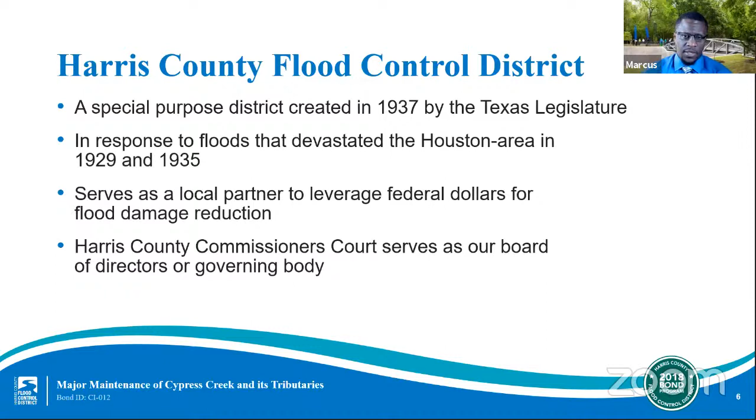The Flood Control District was created to serve as a local partner to leverage federal funding for flood damage reduction projects. While the Flood Control District is a separate entity from Harris County, we are part of the Harris County system and governed by the Commissioners Court.

The mission of the Harris County Flood Control District is to provide flood damage reduction projects that work with appropriate regard for community and natural values. One of the most difficult challenges we face is constructing effective projects that are sensitive to community and natural values in highly urbanized areas.

Harris County includes 22 main watersheds totaling approximately 1,800 square miles and more than 2,500 linear miles of channel. 2,500 miles is approximately the distance from New York to California. A watershed is a geographical region of land that drains to a common channel or outlet. Each watershed has its own unique characteristics and needs. The project we are presenting tonight is in the Cypress Creek watershed located in North Harris County.

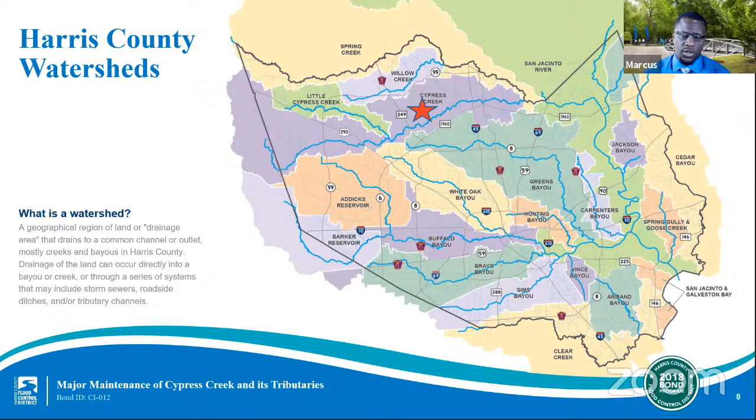Our area is flood prone, and here are some reasons why. We're prone to extreme rainfall events, including tropical storms and hurricanes. We have flat, slow draining land and topography. We also have clay soils that do not soak up excess rainfall quickly.

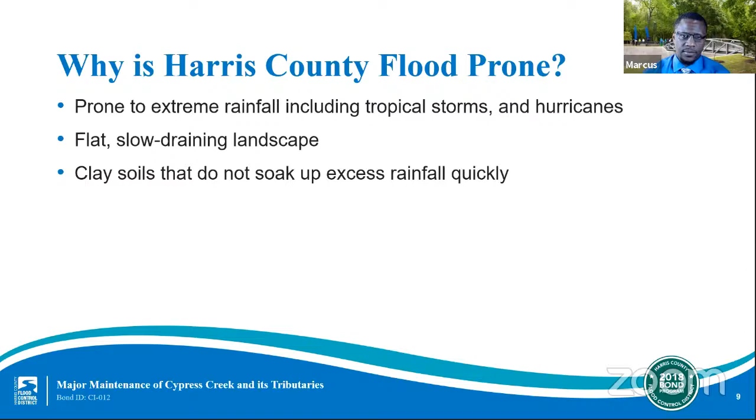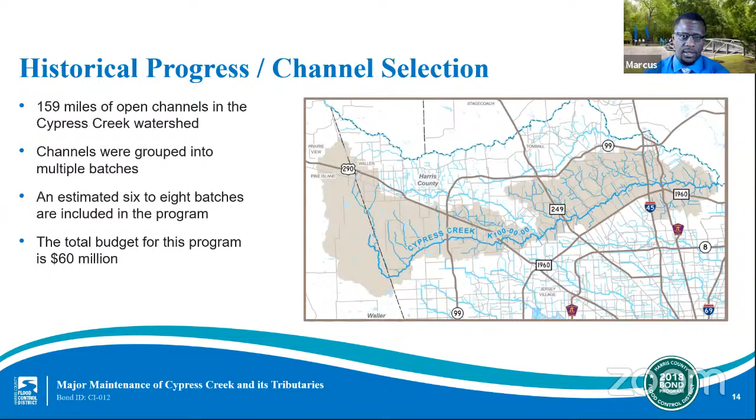The Flood Control District completed field assessments of the channels in the Cypress Creek watershed to determine the state of those channels and the scope of work needed on each. In order to maximize the number of crews and work being done, we broke the scope of work into batches. Batches include channel projects that are grouped together by geography or other factors. For this project, we're planning to have between 6 and 8 batches with a total budget of $60 million.

This program includes channels within Cypress Creek watershed for which the Flood Control District has property rights. Channels that are included are newly built or have previously been altered from their natural states. Natural channels are not included except for on the main stem of Cypress Creek. For the first 3 batches, there will be nearly 20 miles of channel modifications in the Cypress Creek watershed. As I previously mentioned, there will be up to 8 batches of channel improvements over the course of this project.

So why are channel repairs needed? Repairing and restoring channels back to their original design allows the channel to convey or move stormwater runoff from the watershed. It enhances positive drainage and restores the channel capacity. Finally, it increases adequate access for the Flood Control District maintenance crews to mow or do repairs if needed in the future. This is not a dredging or widening project. We are simply restoring the channels to their original design.

There are many types of maintenance that will occur over the life of this project, including desiltation, which removes accumulated sediment from the channel. Outfall pipe replacement, which replaces pipes that carry stormwater from neighborhood, ditch, and storm sewer systems to flood control channels. Repair of slope erosion caused by fast moving water. Reestablishment of maintenance berms by clearing vegetation. Repair of damaged concrete lining where needed, and removal of encroachments from the flood control district right of way. Each of these play an important role in our efforts, and we will now discuss a few of these in depth.

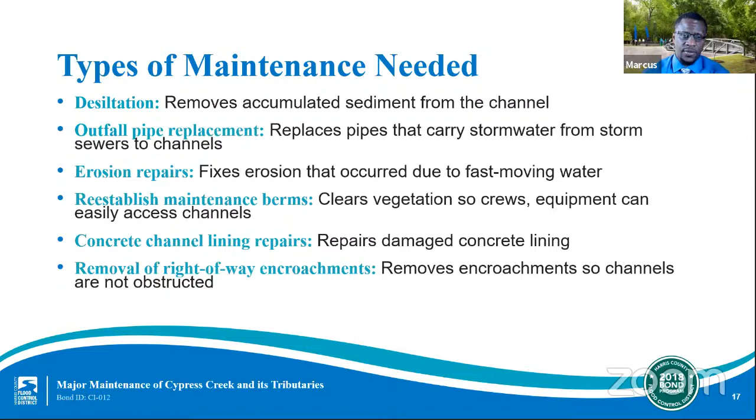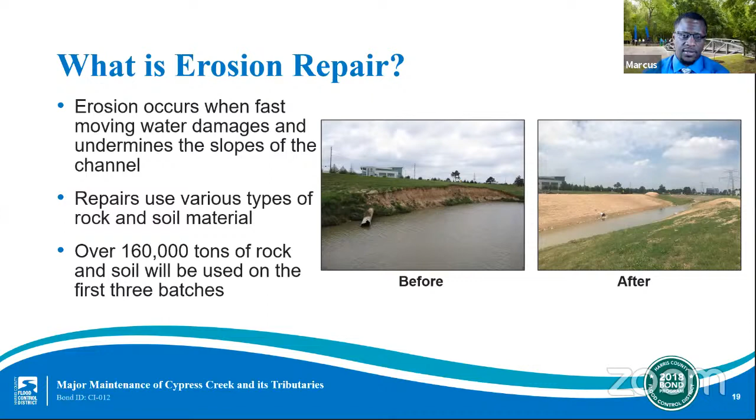Next is erosion repair. Erosion occurs when stormwater removes portions of the channel slope, creating a hole or a sheer drop. Severe erosion can potentially damage other nearby public infrastructure, such as utility lines and roads. The flood control district uses various types of rocks and soil material to repair and protect the slopes from future erosion. Rock material is buried and eventually planted with grass. It is cost-effective and environmentally friendly. In the first 3 batches alone, we will use over 160,000 tons of rock and soil for erosion repair.

Finally, encroachment removal. Encroachments are permanent or portable structures or objects that have been placed in the flood control district right-of-way, including things like fences, swing sets, sheds, swimming pools, bird baths, and other outdoor furnishings.

Encroachments on flood control district property can obstruct drainage channels from carrying stormwater efficiently, block maintenance equipment from performing necessary repairs, increase the overall cost of maintenance of existing infrastructure, and prevent rescue workers and first responders from reaching people during particularly hazardous weather events.

If you receive an encroachment removal notification from the flood control district, the flood control district's encroachment removal office is available to assist the property owner through the entire process. To learn more about encroachments or the encroachment removal program, submit your questions and comments and visit www.hcfcd.org/encroachments.

We know that trees are important to residents of the Cypress Creek watershed, and we've worked extensively with our urban forestry team on tree protection, root pruning, and vegetation removal. We have identified and are protecting many large and mature trees along many of the channels. We would do extensive vegetation removal to reestablish the maintenance berms, which was one of the types of maintenance I mentioned earlier.

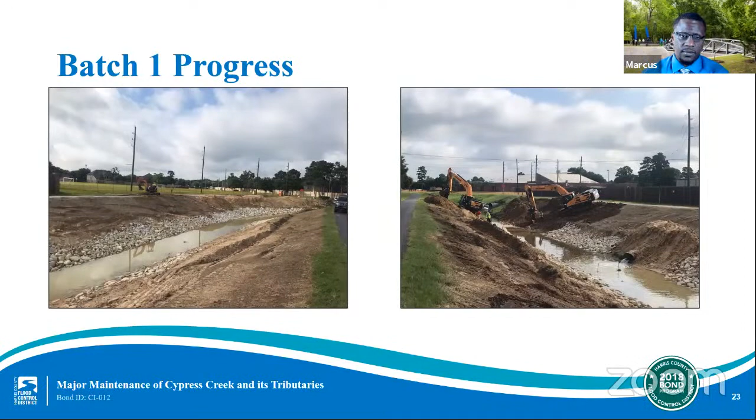Batch 2 includes approximately 5.6 miles across 9 different channels. The cost for this batch is $3.3 million. The estimated start date is later this summer, with construction concluding at the end of 2023.

Batch 3 includes approximately 5.8 miles on at least 11 different channels. The cost for this batch is $10.8 million. We're planning to go out for bids on this later this summer, so construction will begin this fall and conclude in late 2023. Please note that we will be adding additional channels before going out for bids, so please check the web pages for updates.

Here is a full breakdown for the 3 batches, starting with the number of channels and channel length. The total figure for rock placed includes granular fill, or smaller pieces of soil, and riprap, which is larger rocks that are used to fill in and protect against future erosion. Finally, the last column shows the total length of storm sewer outfalls that will be replaced.

Now let's take a look at the next steps. As I mentioned, batch 1 began construction in early June. Batches 2 and 3 both will start later this summer and fall, respectively. We're currently determining the channels to include in future batches. We plan to hold additional community engagement meetings for this project annually due to the extensive geographic size and timeline of the project. I will now turn it back over to Imelda to kick off the Q&A.

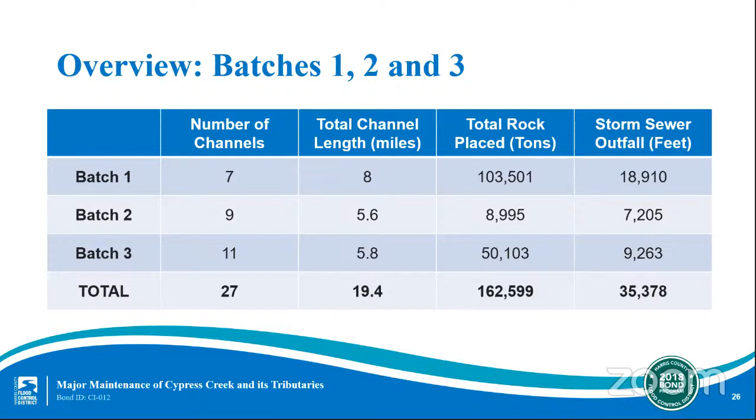Thank you, Marcus. We have another question coming in for you. What are the benefits of removing silt to reduce flood risks?

So as we have different storm events, as the water comes up, it's moving very fast. It picks up soil along the way. And then as the water starts to recede, it slows down, and that extra silt that's picked up is deposited somewhere else within that channel. So by desilting these channels, it allows us to restore them to their original carrying capacity.

So at some point, maybe there were 5 to 6 feet within a channel, but over years and years of storm events and picking up silt from other locations within the watershed and depositing them in these tributaries, then by removing that, you restore the carrying capacity, thereby increasing or restoring the conveyance, which was originally intended for the design, and thereby reducing flood risk.

Thank you. We have a question coming in from Greg. Greg is asking, does this include Little Cypress Creek Watershed? So the desilt for these projects do not include anything in Little Cypress Creek Watershed. This would be only the tributaries which are man-made within Cypress Creek and a few locations along the Cypress Creek main stem.

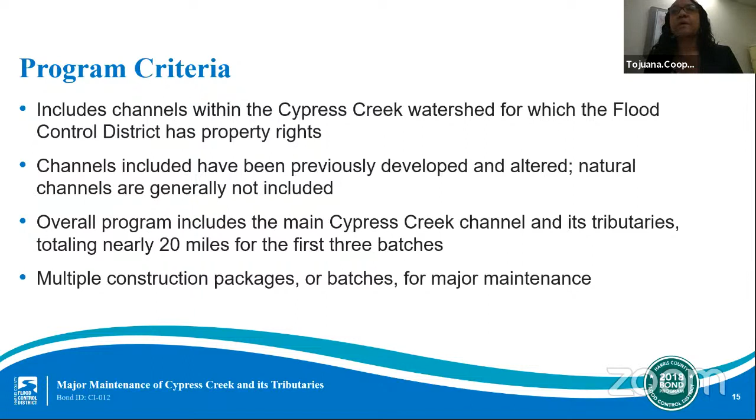No, this project will not eliminate flooding. Although this project will reduce the risk of flooding in the area, the risk of flooding will remain, and any area in Harris County can flood given enough rain. The Flood Control District recommends that everyone in Harris County and surrounding areas have flood insurance to insure against the possibility of personal and financial loss.

So visit www.hcfcd.org/MAAPNEXT to learn about the Flood Control District's MAAPnext initiative, which aims to produce Harris County's most comprehensive and complete set of flood hazard maps and information. Thank you so much for that information.

Marcus, can you explain why we're not widening or deepening Cypress Creek itself? So we had a recent study of the Cypress Creek watershed and found that the main source of flooding within the watershed wasn't the insufficient capacity of the tributaries, but actually the backwater rising from Cypress Creek. So widening and deepening Cypress Creek and other natural channels becomes complicated and expensive because it requires extensive environmental permitting from the Corps. In flood control, we've typically focused on building stormwater detention instead. There's more information about that on the website.

The widening or deepening of tributaries, like widening or deepening of Cypress Creek itself, would also require the additional purchase of right-of-way, which would include taking homes and businesses, which would be disruptive to the community. So while this major maintenance project will not widen or deepen tributaries, it will allow them to function more efficiently and carry more stormwater, without the need for disruption or excessive property acquisitions, if you will. With that said, of course, we'll continue to evaluate Cypress Creek and its tributaries on a case-by-case basis.

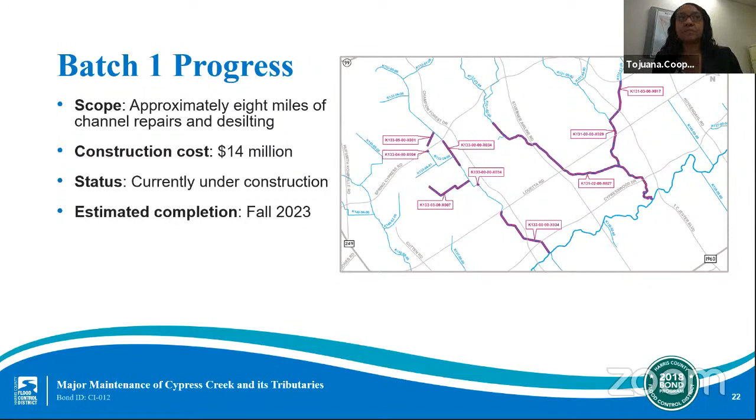Thank you. And Tojuana, I don't know if you want to take this question as well, but we have Paul saying that his house is next to the project area in batch 1. How can we keep children safe during construction? Well, I would hope that the children would not be playing or moving around inside our right-of-way. The contractor basically is responsible for the area that they're working in, and they're going to have some safety measures that they implement. But we do ask people to make sure that they stay away from our right-of-way while the contractors are working in the area.

Great reminder, thank you. We have another question coming in from Leander. He says that they live in Memorial Hills, in a Memorial Hills subdivision. Will these improvements on Cypress Creek result in the creek being able to handle 25 inches to 35 inches of rain?

And I'll take that question. You said 25 inches to 35 inches. No, just to give you an idea of how much that 25 inches of rain is, and I'm assuming that we're talking about a 24-hour period here, that's more than Harvey level. Harvey itself, if you looked at it in terms of a 24-hour period, was about 16 to 18 inches within a 24-hour period. And there's not a channel currently within Harris County that actually handles that much right now.

Thank you. We had a few people joining in late on our phone line. Marcus, can you explain the timeline for this project again, for those that missed it? Yes, so for batch one, we've already started the construction on that one. That was one of the slides where I showed some of the progress of construction in Spring Oaks neighborhood subdivision. Batch two, we expect to start construction late summer this year. And for batch three, we expect to start in late fall of this year, with both of those projects being completed at the end of 2023.

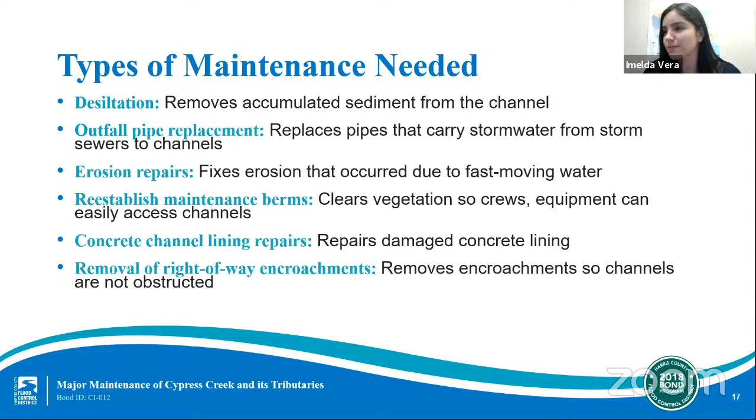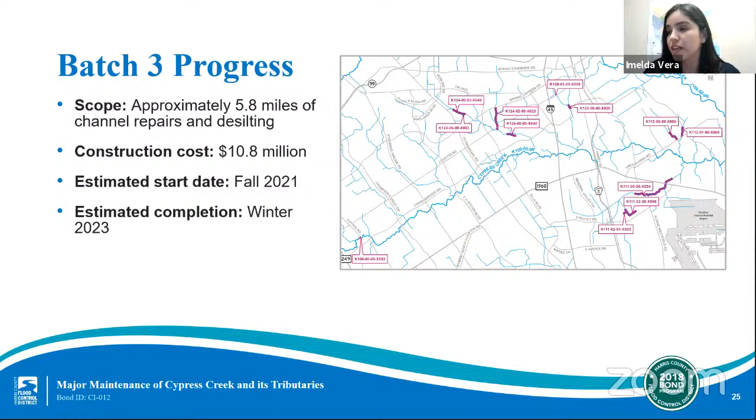Thank you so much. We are getting a question about long-term maintenance. Will Cypress Creek have silt and other debris removed annually to preserve this investment? That is definitely something that the flood control district is working on, and part of some of the plans and discussions that have been going on in Commissioner's Court now. So at this time, that plan to do it on an annual basis isn't there, because what we typically do after storm events is go out and evaluate the channels to determine which portions actually received a buildup of silt, and we submit those to FEMA and other agencies to try to get some partnership funding to desilt those areas which were a result of a major event.

So to answer the question plainly, that is something that we're looking at, having annual or some sort of routine maintenance on some of these natural channels, but there'll be more to come on that later.

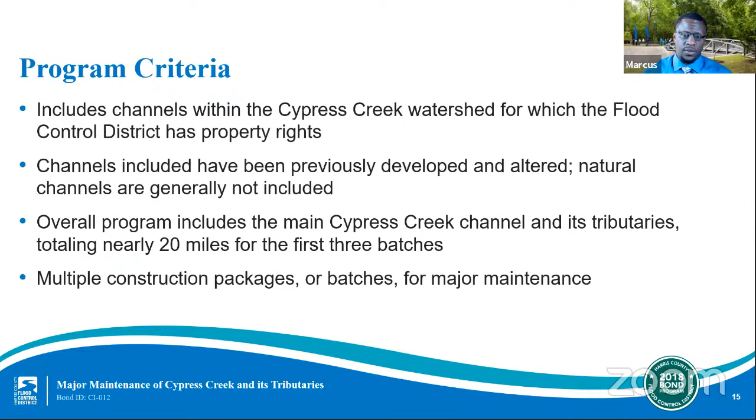Tojuana, the next question is for you. Why not do all the repairs all at once? Why in smaller batches? Okay, well, first of all, the bond program includes $60 million for this project. And most contractors that do this type of work, which is channel repairs and pipe outfall repairs, cannot manage a $60 million project. So the sweet spot for a project of this nature is around $10 million.

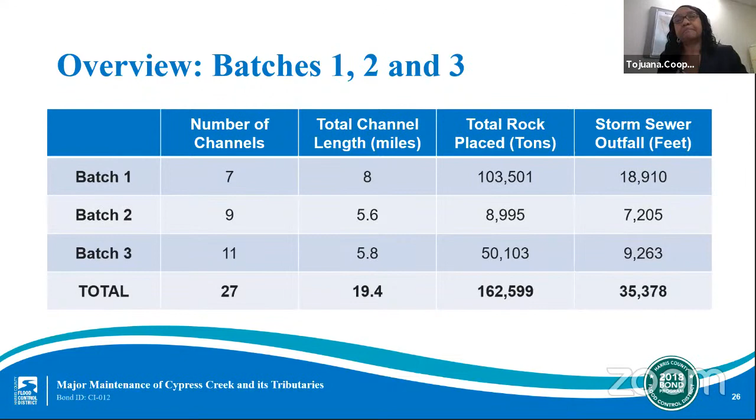Because of this, we decided to break the work up so that we can have multiple contractors working simultaneously across the project. Now, if we tried to do it all at one time, we would also have to consider the environmental permitting issues that need to be resolved with the U.S. Army Corps of Engineers, and that could delay it. So we're actually able to get more work accomplished quicker by breaking it up and not doing it all at one time. Thank you for that explanation.

Marcus, the next question is for you. How is this project being funded? Right now, the project is fully funded via the 2018 bond program. During the meetings that we had prior to the bond election, $60 million was set aside specifically for this effort that we're working on now.

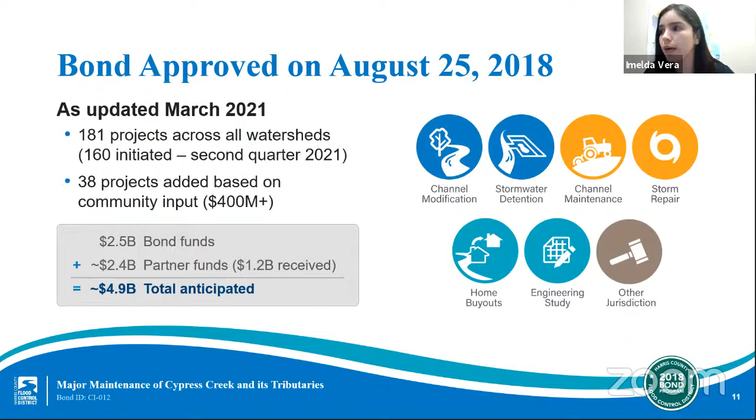Another question for you. Would widening or deepening a channel require additional land to be purchased? In the particular case for these projects, yes, widening and deepening would require additional right-of-way, for a couple of reasons. One being the improvements themselves. As you go deeper with our standard cross sections, the way we design our channel segments and the slopes that we determine handle high velocities better without failure.

Once you start to deepen it, the amount of area that you need in order to get the full channel width and 30 feet of maintenance berm on either side of the channel becomes significant. On some of these tributaries, we have encroachments, and some are right against the edge of our right-of-way. So we pretty much have to purchase people's backyards and in some cases, homes, sheds, or things like that in order to expand the channel.

The second component where right-of-way would be required when you widen or deepen the channel is the detention basin. As I mentioned earlier, the detention basin itself would require land to go somewhere and dig a basin to mitigate those flows, because we cannot widen and deepen a channel beyond its original intent without transferring the risk to someone downstream. In any case, when you do that, you'd have to mitigate those impacts and show with hydraulic and hydrologic analyses that you did not transfer the risk from one area to another.

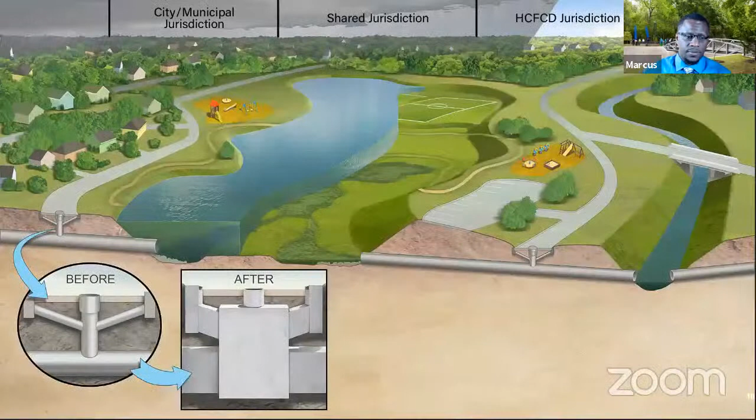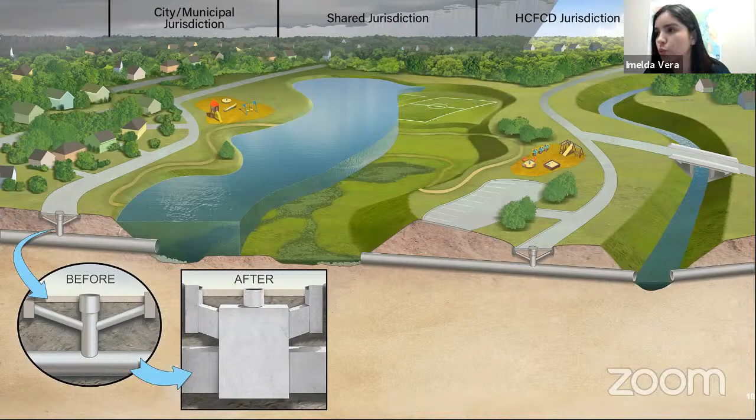Thank you, Marcus. Tojuana, the next question is for you. In the presentation, in the pictures of batch 1 progress, it looks like there are trails. How can our neighborhood build trails along flood control right of way?

That's a good question. While the flood control district's mission does not include recreation, the flood control district supports the multi-use of its property for recreational and other compatible uses, such as trails when appropriate, and works frequently with third-party sponsors who want to finance and maintain those amenities while not obstructing the channel. So in areas where the flood control district does not own the property outright, the trail sponsor must obtain a trail easement from the fee owner of the property. On the other hand, where the flood control district holds the property in fee simple ownership, we will allow a trail to be built there under the following conditions.

Those conditions are: first, a sponsor must agree to construct, operate, and maintain the proposed trail. Second, the sponsor must agree to maintain, which is mow, the rights of way from top of bank to property line on the trail side of the bayou, creek, or channel. And the sponsor must also agree to pick up litter.

The third condition is that a formal agreement is necessary between the flood control district and the sponsor, which could be a city, a utility district, a county precinct, homeowners association, or other legal entity. The fourth condition is that the trails cannot interfere with the flood control district's mission, and the sponsor will have the duty of repair or replacement of the trails should they become damaged through use, flooding, or flood control district maintenance operations. And the public must be allowed access and use of the trails.

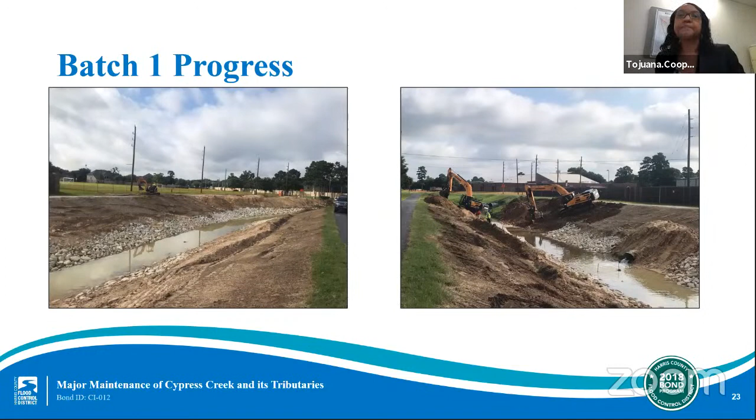Thank you so much for that information. The next question is also for you, from someone that says her channel has been desilted but is accumulating more silt. How often will you be repeating the desilt? How often will the flood control district be repeating the desilt?

Okay, Marcus addressed that earlier. Marcus, would you mind restating the answer to that one, where we talked about repeating the desilt process? Sure. So right now the plans to do these desilts or repairs just depends on the final conclusion of what we come to with our ongoing maintenance program for what we do going forward as a district.

One thing I could say is that during major events, once there's a natural disaster declaration declared, at that point we're allowed to investigate which areas have significant silt accumulations, and then we submit those to FEMA to say, based on this storm event, we've had this much accumulation of silt, and we'd like some sort of funding to repair or remove the accumulation of silt to restore it back to the original design. So as I mentioned previously, there's more to come on that, because it is something that we're working on with Commissioners Court.

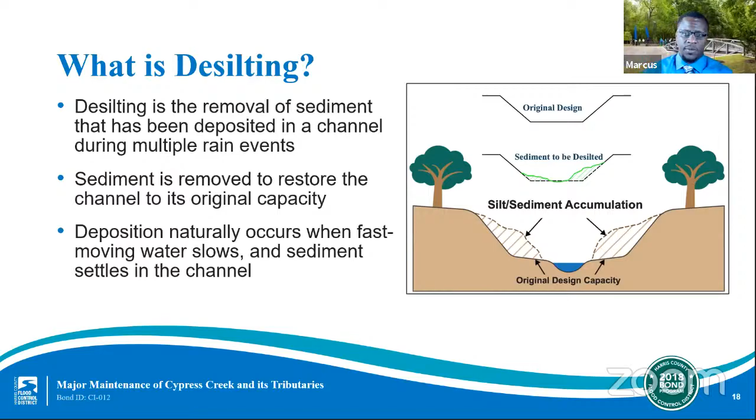Yes. So our flood control guidelines, there are several rules that we have in place to ensure that any new development does not make a situation worse. That includes sometimes providing detention for the additional increase in conveyance to the channel with a detention basin. It also considers the amount of fill, or how high a development builds up within a floodplain.

So for every amount of dirt that the development puts within a floodplain, they have to account for that in some detention facility somewhere. Within our watershed management department, they have the charge of reviewing those reports, making sure they're following the guidelines of flood control and our local floodplain administrator, to make sure that any development that goes in is not making the flooding situation worse. It doesn't always make it better, but it doesn't increase or transfer that risk to others.

Yeah, another question for you. Will this work change the floodplains or floodplain maps?

No, and the reason for that is that this project is simply taking it back to original design. So when the floodplain maps were created, they took snapshots of the channel as they were, and that's what the mapping is based on. So these desilts, while they will provide some benefit - how much, we haven't run the numbers to determine what the silt was versus what it looks like going back to the original design - you will get some benefit, but it won't be so much that it reduces the extent of the existing floodplain maps.

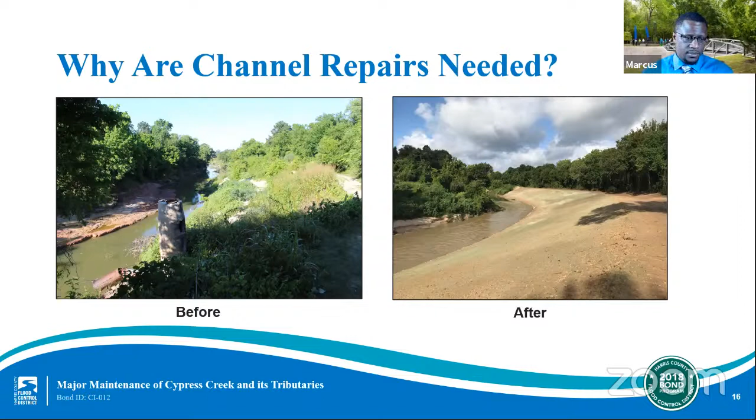A lot of the questions we've been getting have been in regards to the work being done in batches. Marcus, would you mind going over the portion of the presentation where you talk about the work and progress for each batch?

Sure. For batch one, we're looking at about 8 miles of channel repairs and what we consider desilting. That's the one currently under construction, started in June, with a construction cost of $14 million.

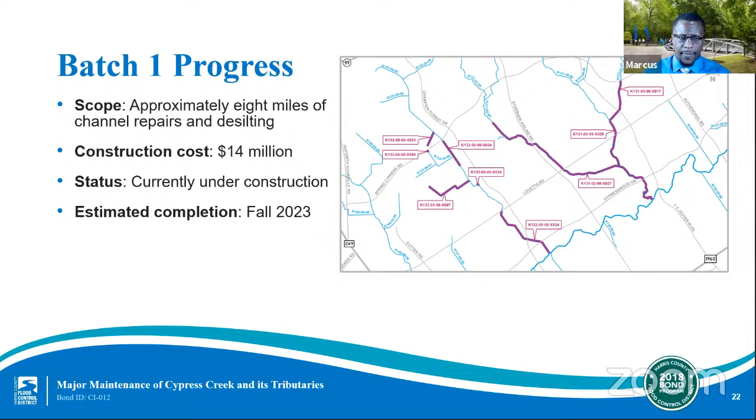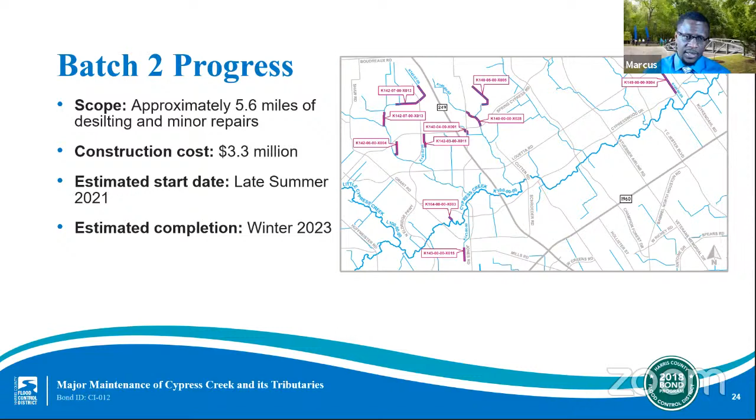Batch two is approximately 5.6 miles across, about 9 channels or so, with $3.3 million. That one's expected to start construction in late summer of this year, with an estimated completion in late 2023.

Batch three was approximately 5.8 miles with $10.8 million in construction costs, expected to start in fall of this year with the same completion date as the previous batch, later this year in 2023.

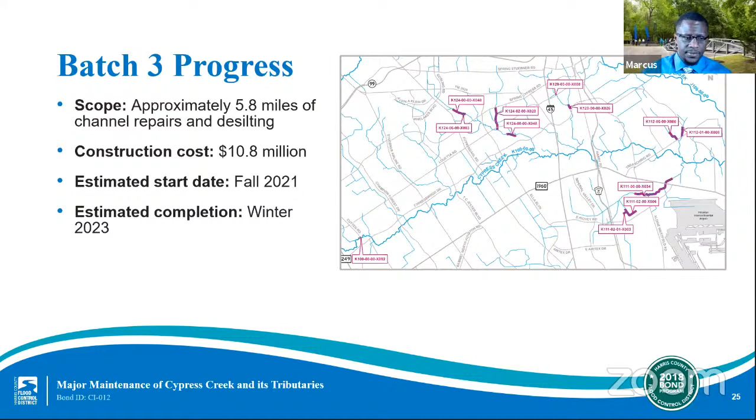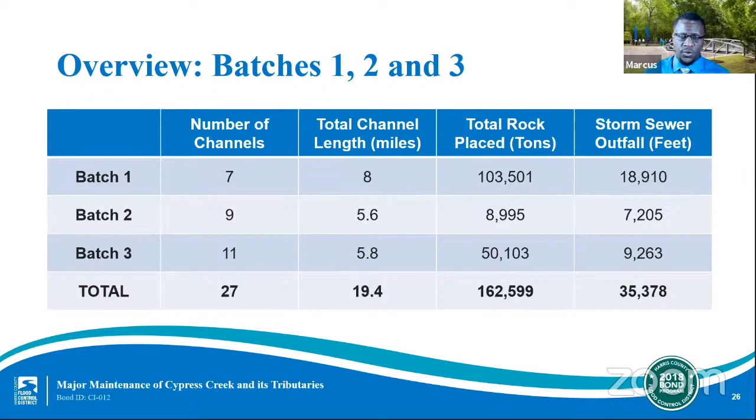The exhibit here shows the number of channels on the left side of the table, the total number of miles, and the total rock placed. The rock placed accounts for both our large rocks, which we refer to as riprap, and the smaller granular fill soils used for the repairs. On the further side of this table it shows the linear feet of outfalls or storm sewers that we plan on replacing with each batch.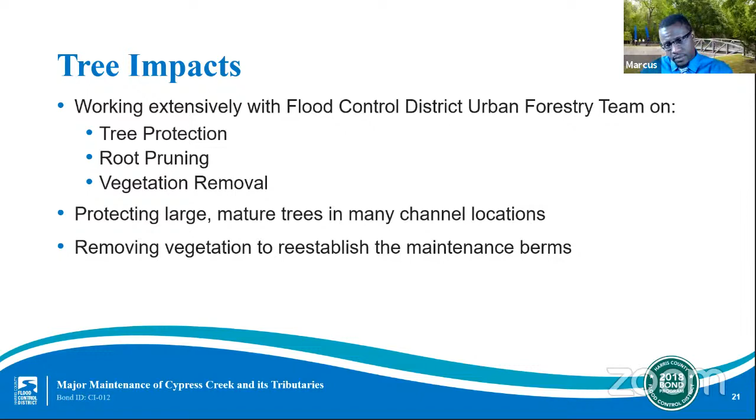Thank you. We have a question coming in about encroachments. Why are encroachments being removed, and what harm do they do?

And Tojuana, you're muted. Thank you, there we go.

Encroachments are things placed within Harris County Flood Control District's right-of-way that should not be there. They're harmful to the maintenance process because they block our access to get in there and maintain our channels. We have to get equipment in, and we also have to have room to work to restore the channels. So encroachments that are there block the access, and we cannot allow illegal encroachments to be inside the right-of-way.

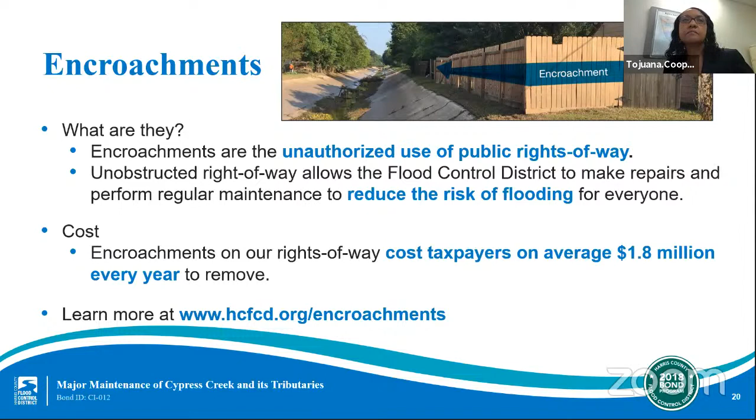We have a resident asking, what can I do if I see a fallen tree or another type of problem? The best way to report a fallen tree is to go to www.hcfcd.org website, where there's a service request option where you can report that type of issue. It goes through the system and is filtered out to the proper division so they can come out and help with the issue. So just report the problem and we'll have someone come out and take a look.

Thank you. Tojuana, the next question is for you. Why were these channels neglected prior to now?

That's a good question. Maintenance across the county has been deferred in the past because of a previous lack of funding for the maintenance. The 2018 bond program has allowed us to move forward with restoring the channel conveyance across the Cypress Creek watershed.

Thank you. Marcus, a question coming in for you. How much of this project is bond funded and how much is coming from other sources?

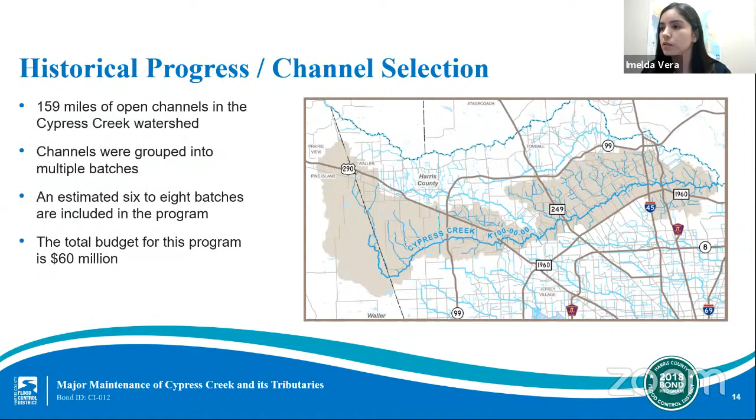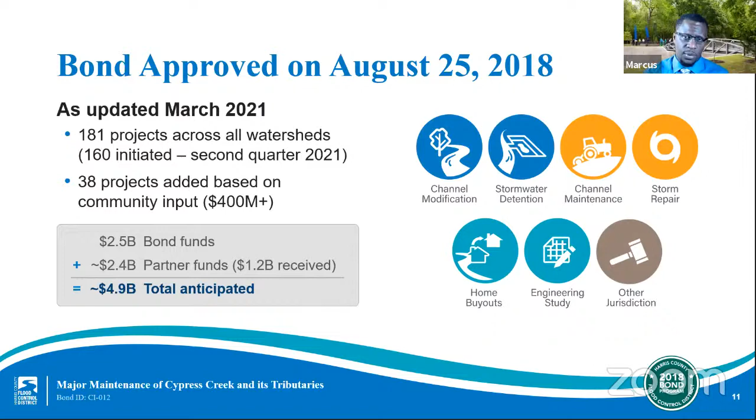So for this particular project and the work that we're talking about in batches 1, 2, and 3, these are all fully funded by the 2018 bond program. That's the $60 million that I mentioned during the presentation, all coming from the bond. Now, that's not to say there won't be portions in later batches that will be part of some other program or funding source that we're showing on this exhibit here. But right now, it's 100% bond funded.

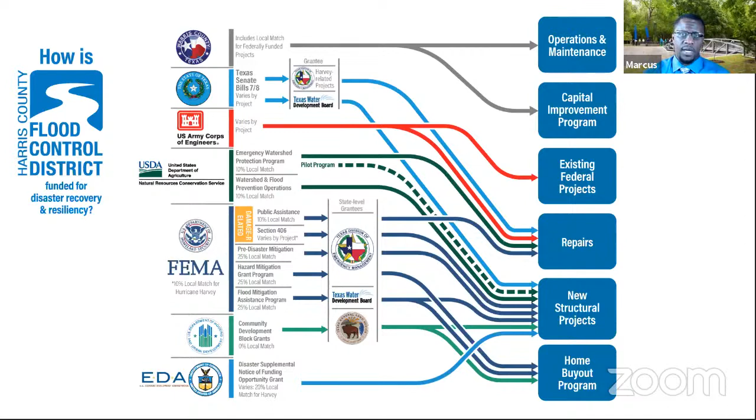Marcus, could you please go over the timeline for this project? Sure. Batch 1 began in June, and it's already under construction. Batch 2, we expect to start later this year, as well as batch 3, probably around summer for batch 2 and fall for batch 3. Both of those projects, we anticipate to finish by late 2023.

The future batches that we're working on now, I'd expect us to start design on those maybe early next year, towards the end of this year. In terms of when construction would start, it depends on which tributaries or portions of Cypress Creek we decide to roll into those packages to hit that number we mentioned previously, plus or minus 10 million. So more to come on those future batches, but we will keep the public engaged and aware of what's coming.

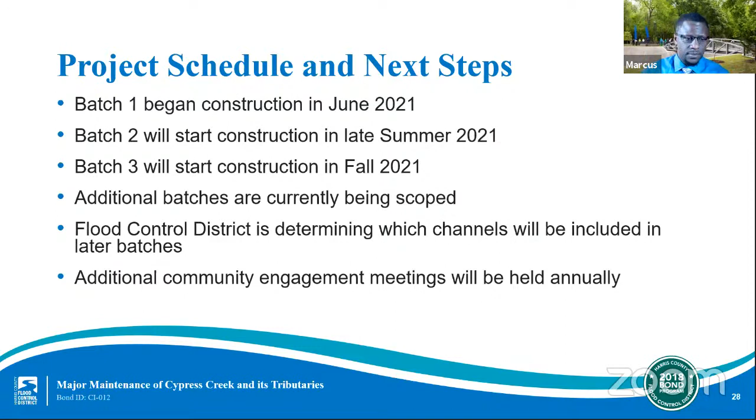Thank you. Another question for you: when will we know more about what's in the next series of batches for this project? I expect, and I kind of just mentioned it, that we'd know more about these other batches probably closer to the start of January of next year.

Thank you. Tojuana, we have this question that came in earlier, if we can address it again. People are always interested to know, will this project eliminate flooding altogether? Although the project will reduce the risk of flooding in the area, the risk of flooding will remain. Any area in Harris County can flood given enough rainfall. The Flood Control District recommends that everyone in Harris County and surrounding areas purchase flood insurance to insure against the possibility of personal and financial loss.

Now, to learn more about the Flood Control District's MAAP Next initiative, which aims to produce Harris County's most comprehensive and complete set of flood hazard maps and information, you can visit www.hcfcd.org/MAAPNEXT. Thank you.